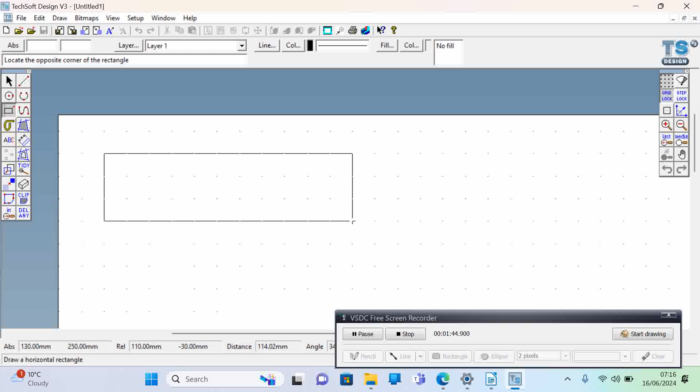So it's 3 tall. I want it 17 across. So if you look at the rel, I've got the 30, and at the minute it's 50 because it's only 5 across. So I need to drag it all the way till it gets to 170. 170 millimeters, 17 centimeters. If I click my mouse again, I've got my solid object. Fantastic. The next thing you're going to do, you're going to zoom in even closer, because now you're going to start to add the detail.

It's really important you get this accurate, so keep it on grid lock. These are going to be your first measurements, so you can mark your centimeters. So you need to go to the line tool here. If I hold my mouse over it, it says lines. I'll click it, and I want to line up my cursor with that first dot within my rectangle, pull it up and line it up with the edge of my ruler. Do it with my second dot as well, line it up and click. So there I have my centimetre markings.

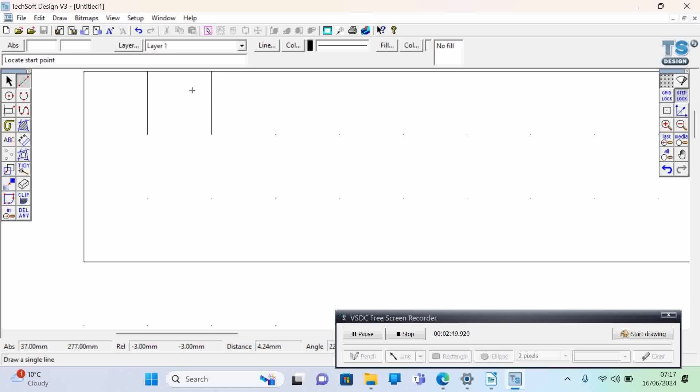Now I want to add my millimetres. Grid lock sticks to the centimetres. If I want to be able to get into those tiny little gaps, I need to change from grid lock over here to the right of the screen to step lock. So I'll click step lock, and this will pick up on every individual millimetre within the centimetre. So I'll zoom in again because I'm going in for further detail. I'll drag my scroll bar across. And there I have my 2 centimetres.

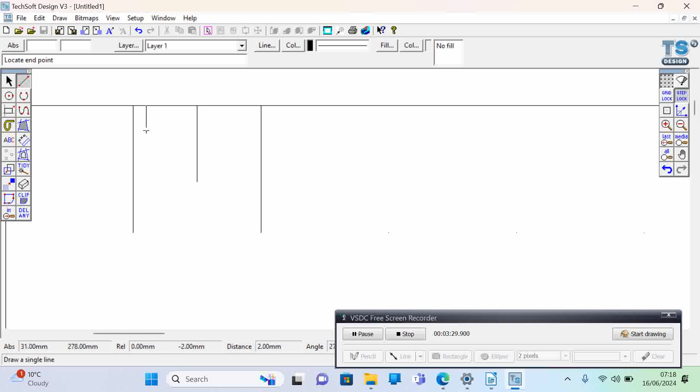I'm going to find the middle, which is here, in between the two. And you can count the steps. Do that in a second, just to make sure. I'm going to bring that 0.5, my half centimetre, line slightly shorter than my centimetre lines. And then my individual millimetres, I'm going to find those spaces in between the centimetre and the 0.5 mark. They're going to be even shorter.

Now, if I want them to be consistent, I can use the select tool, click that object. It'll highlight there with the yellow boxes. You can use the keyboard shortcut Control and C. That will copy, and then if you press Control and V, it will paste. So just a reminder there, Control C and Control V.

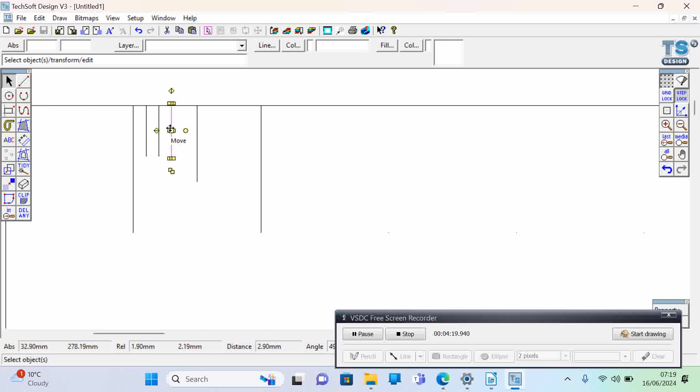If you want to move a shape, go to your object, and in the middle there will be a yellow box. And if you hover over it with that 4-pointing arrow and click, you can then drag it. If you're still on step lock, which you should be, it'll automatically snap to the millimetre grid. So I can paste again, Control V, and it means my lines will always be the same size. So I'm going to keep pasting till I have all those gaps filled in, making sure you're not leaving any gaps. Keep pasting. And there I have the markings for my 0 to 1 centimetre section of my ruler.

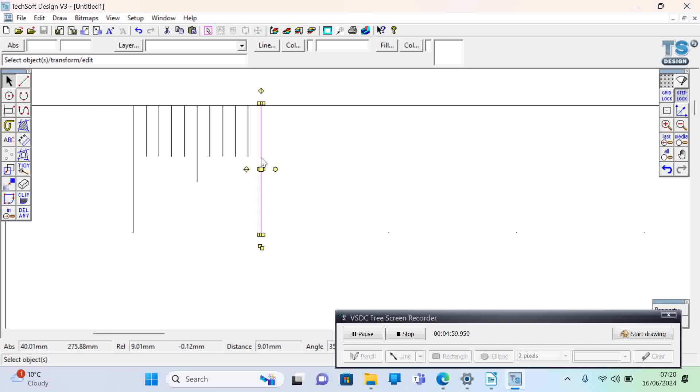There should be 1, 2, 3, 4, 5, 6, 7, 8, 9, 10, 11 lines now on your ruler. What you need to do is make sure you have those lines there. Make sure you count them in your document, because many students sometimes manage to do this, and as you copy and paste this shape, you're going to be 1 millimetre short. So make sure you have 11 lines.

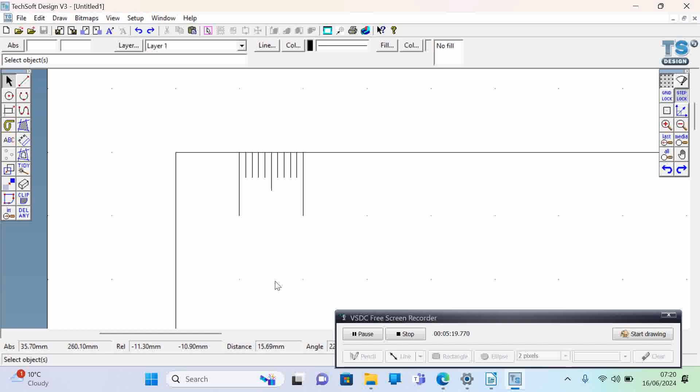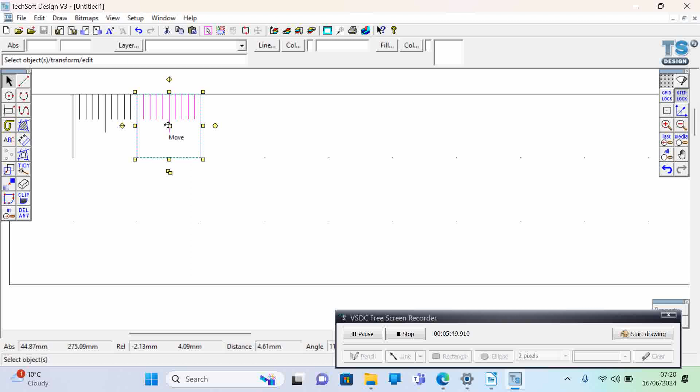Once you're up to that stage, you can use what you've drawn here to make the next part of your process much quicker. So I've zoomed out. I can use my select tool to highlight what I already have. I can use Control C to copy, Control V to paste, and there I have a complete replica of what I've already made. Now I'm not going to put it right next to, because that means I'm going to have an extra millimetre here. So I need to drag it across, and I've kept that long line because it means if I click away, I know I've got that bang on alignment.

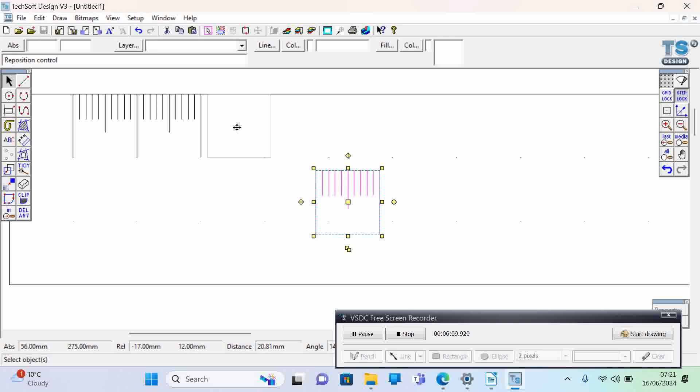So it does mean, in reality, if I delete that line, I'll still have a line underneath, and you don't need to delete it because the laser cutter will still just recognise it as a single black line because they're thin, but it helps you with your registration, making sure everything's lining up as it should. So I'm just going to keep pasting.

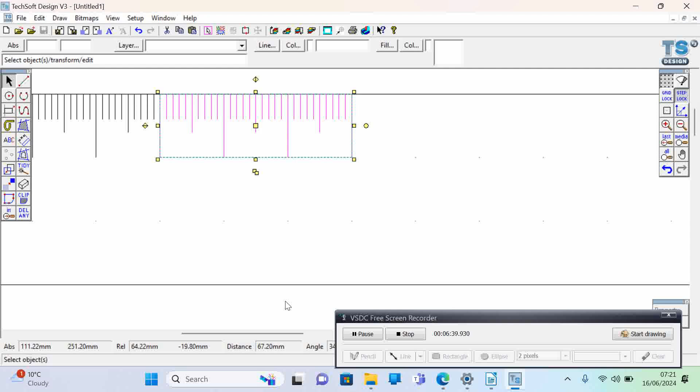Now, if I don't want to copy and paste again and again with small increments, I could use the select tool to highlight all of those lines and use Control C and Control V to copy and paste, and then line them up again. So I've got 2 sets there, 3, as we're making a 15 centimetre ruler, I'll only have to do that until I've done it 5 times.

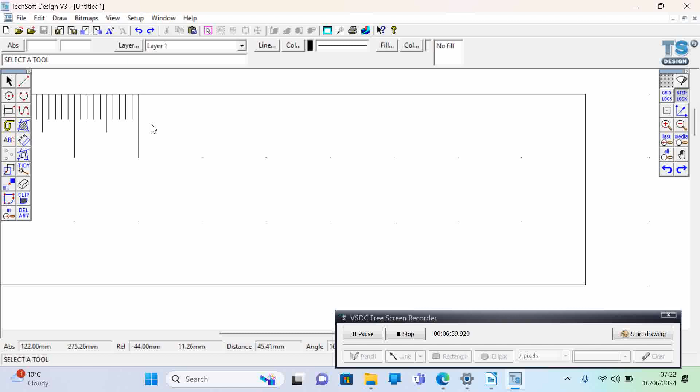If you lose your cursor like that, I've clicked off and that's just floating there, there are 2 things you can do. You can press Control Z to delete that because it's an edit undo. You can only do that once in 2D Design, or if I've clicked off it and it's floating, you can use the select tool, just highlight them all. It'll group the objects and you can move them again. One last one, Control V to paste, move them into place.

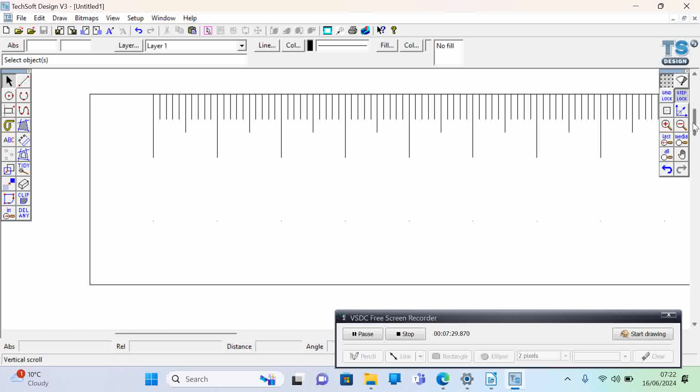So what I have, I've got all my markers for 0 to 15 centimetres, this one will be 15, and either side I have a centimetre gap here and a centimetre gap at this end. So that's the stage you want to get at before you start adding text.